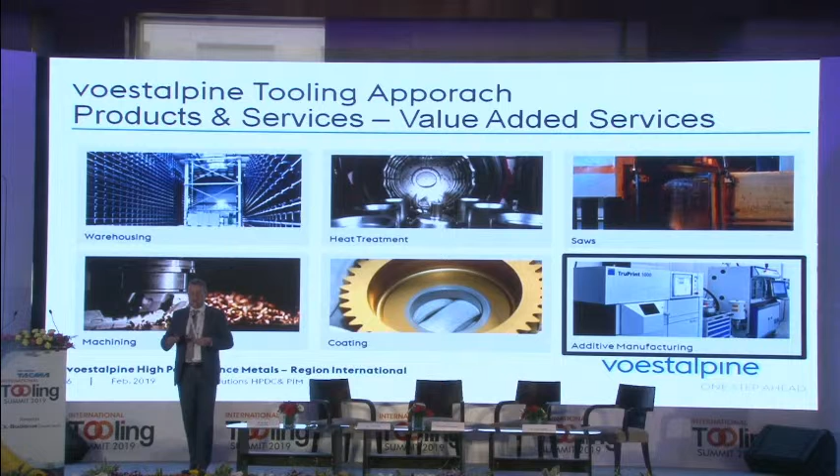But what's missing here is one corner, and we see it as the last step in the service development of our approach to you, which is the additive manufacturing. We started with additive manufacturing in 2015-16, and we made huge steps, which I want to show you right now, talking about our AM. Because additive manufacturing in the tooling industry is, in our perspective, the missing link to the full solution. From the steel to the service around the steel, right up to the last development of additive manufacturing, solving the problems we're facing every day on more or less every mold.

This brings me now to the approach on additive manufacturing. Where are we standing today in our big worldwide acting division? And this is the important thing, which is most probably differentiating us from all the others. We start already at the alloy development. So we create our own powder for additive manufacturing. We create it and we produce it. We have 2 mills where we do that, seriously.

That's the powder itself. But the powder is nothing if we do not have the right design and the right simulation service on that, followed by the printing itself, the post-machining, the heat treatment, as well as the coating. So we are ready to give you the part for using it. No other way for you. You just get the right part ready for the application. And this is just-in-time service. So this is our approach, quite different. We sell a solution, we sell responsibilities, not just euro per kilo steel. That's quite different.

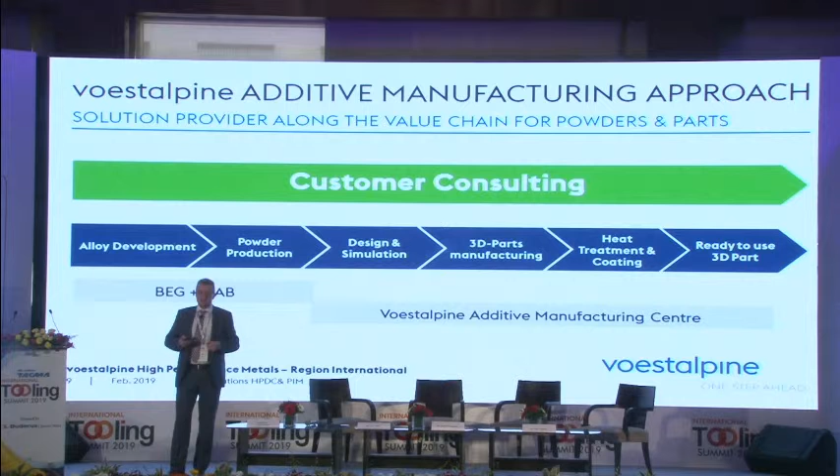Very quickly, we have in Europe our two plants where we do the steel production, and we added on both plants the powder production. One is in Sweden under the brand of Uddeholm, the other one is in Austria under the brand of Böhler. So we have our own powder, as I said.

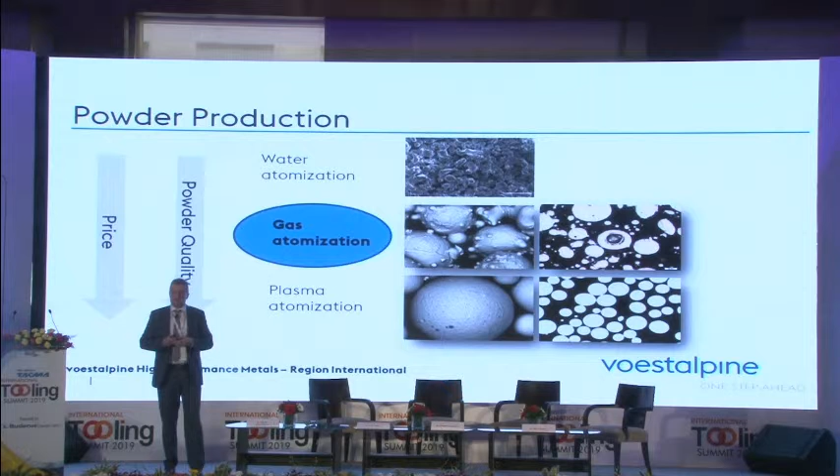When we are talking about the powder, we talk basically about three types of atomizing processes. But for metal additive manufacturing, we talk about gas atomized powder. Gas atomized powder then runs after the atomization through a sieving process where we sieve out our two powder sizes, listed here: 15 to 45 microns, as well as 45 to 150 microns. Why do we have different powder sizes? Because we have not only powder bed technology, we also have direct metal deposition in our setup to the market.

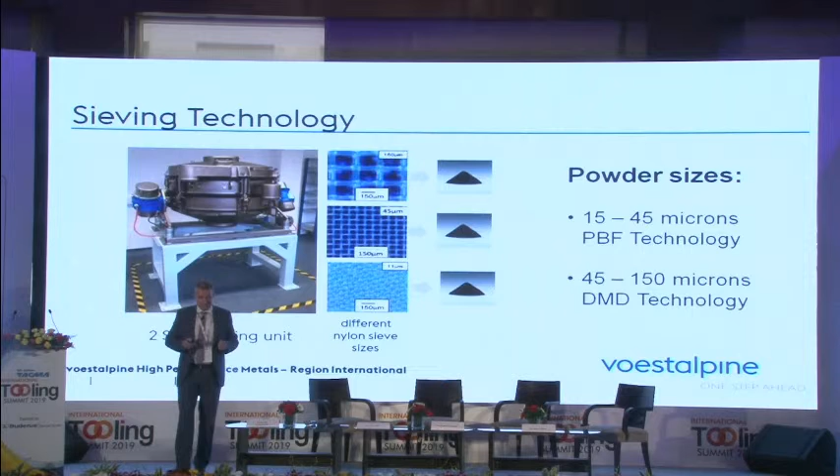This brings me now to the technologies where these powders we produce on our own are used. This should just give you an idea what the technologies are about. We could talk about that for hours, but I really want to come to the point. Whenever we talk about tooling, tool steel optimization, tool optimization, we talk about the technology with the best design freedom, and this is the powder bed fusion technology.

We have a second one. This is the direct metal deposition. We service it with powder as well as with wire. But here we are talking mainly about repair of tools, about service enhancements. So it's a little different technology, but for us the focus in the tooling industry is definitely the powder bed fusion technology, better known as 3D printing.

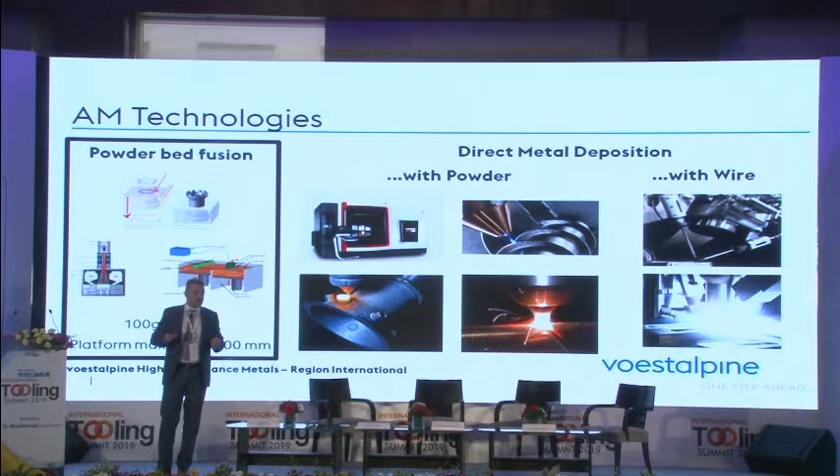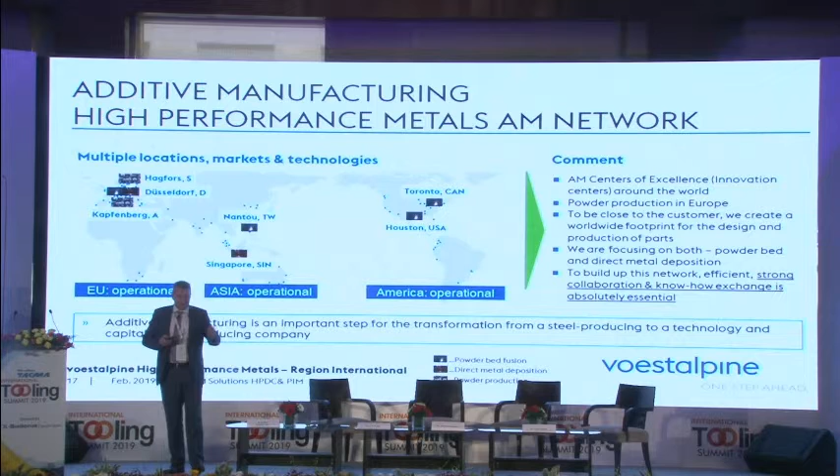So the USPs are clear: the right powder for the right application, with the right design, and the right printing technology. This chain is covered under the service chain of voestalpine. This makes the difference, and this makes us ready today, not to try something or do a little prototyping here or there, but to be prepared for the tooling industry.

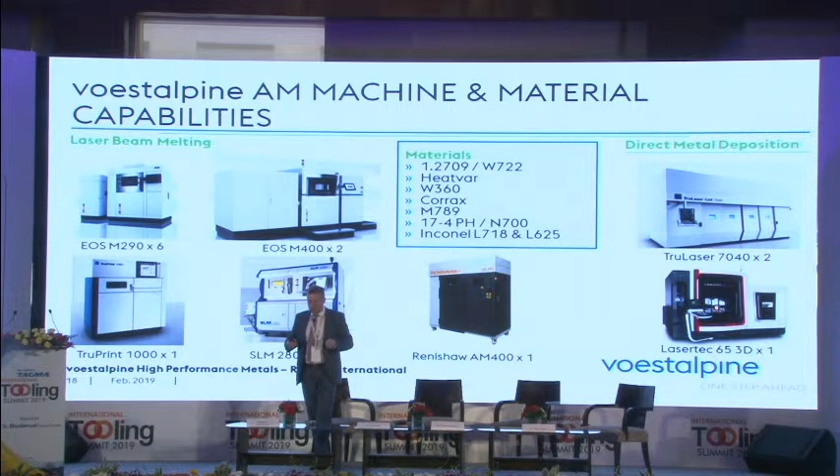What's coming now, dear colleagues, is just a few examples of success stories, confirmed by OEMs and Tier 1s, using additive manufacturing in die casting and injection molding. This is not something we tried in our labs. This is something the customer confirmed on the market all over the globe.

I would like to start with high pressure die casting, where we see three product groups where AM would make sense from our point of view. The first is the distributor or distributor ring, where we steer the liquid aluminum into the mold. The second is the heat-affected sliders, the parts moving in and out, creating holes and inner areas. The third is sub-inserts, or exchangeable inserts, used on the moving molds or sliders as exchangeable heat-affected parts. From each of these three groups I would like to show you one or two examples.

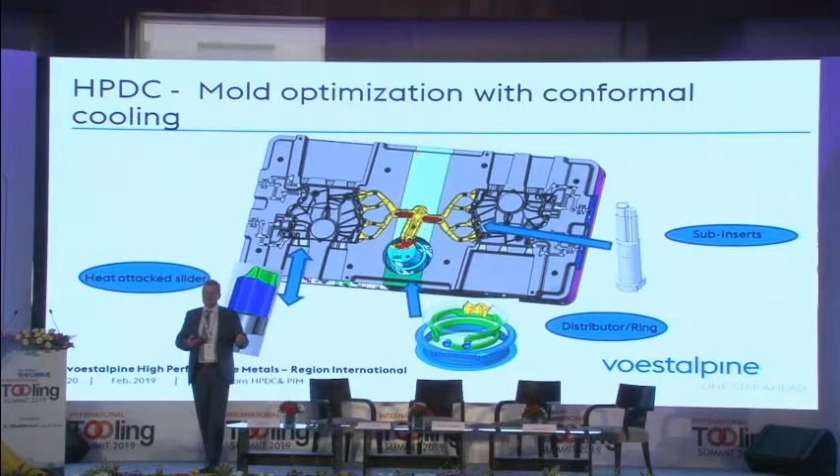In high-pressure die casting, what is important is to understand the customer. We have to know your pain point to react in the right direction. And we can make use of AM very efficiently in many directions. This could be to reduce the scrap rate, very often a serious topic. This could be to optimize part quality.

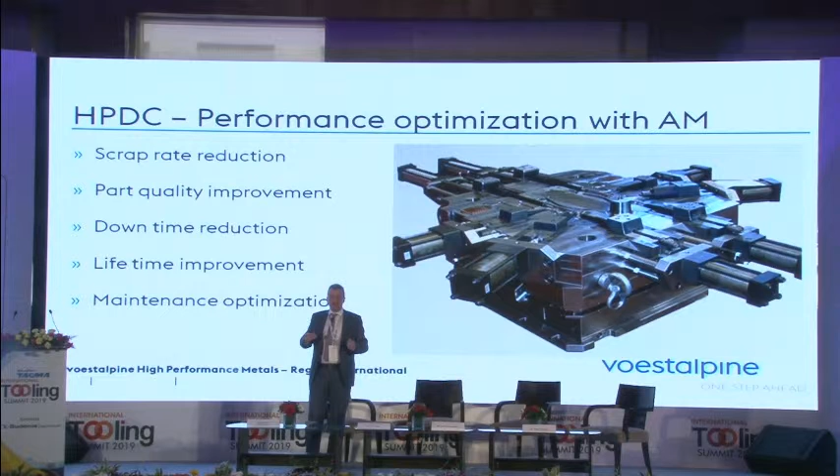This could be as well downtime reduction, most probably for the Tier 1s the biggest headache. Lifetime improvement of the parts themselves. Maintenance, also here in India, a very important topic. Optimized maintenance, no unexpected fallouts and maintenance required. These are advantages we can optimize with AM.

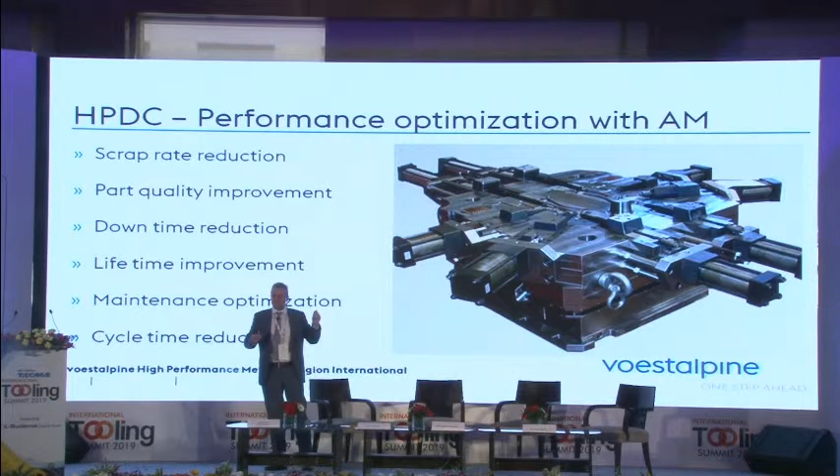And finally, we have certain products where we can also optimize the cycle time. So depending on these real demands of the market, we can optimize our solution to you, ladies and gentlemen. We can optimize our AM service around the steel to you.

And I would like to start with a distributor, which we have more or less on every die casting mold. And the pain points or the idea of the customer was here to improve the cycle time, because this is the main part where we can improve cycle time, as well as higher the lifetime. So you see just roughly the design, and you see behind me the additive version, the conformal cooled version. And this is exactly according to the needs of the customer.

This is very different if he's doing oil or water cooling, if he's running oil with 200 degrees or water with 25. This is very different if he has a third step pressure of 250 bars or 1,250 bars. So we have to know that in advance to make the tailor-made solution for you. This is what we call service in design and simulation.

And in this case, we used our own powder, our own design, our simulation. We print for the customer, and we do the heat treatment. And this is what the customer confirmed to us: we reduced the cycle time by 2.5 seconds, and we increased the lifetime by more than 400%.

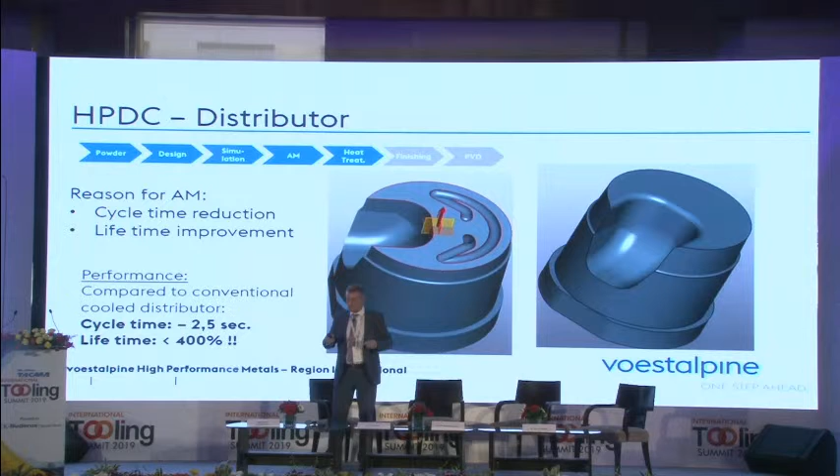Another example for optimization on the distributor area is shown here. This is a hybrid part. It was done with a steel frame and a copper insert. And we realized this in a monolithic way with conformal cooling out of our own powder. I have to tell you, the results are very promising, but the tool is still running, so we don't have final results, but the lifetime and the cycle time could be optimized.

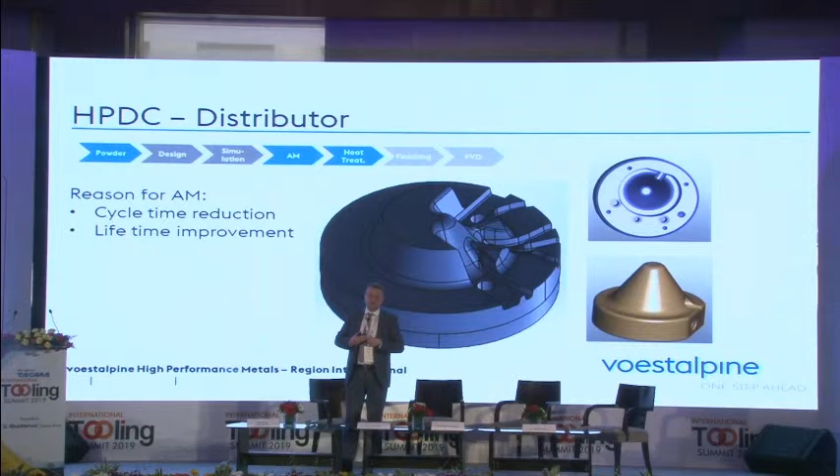When I come to the sliders, these are the moving inserts going in and out, then we have many more options than just to optimize cycle time. Here it is the scrap rate we mainly have to work on. So here we are talking about parts that are existing, having an existing base material, which is typically an H13 type. Could be also a premium steel from our brands. And the printed area. Printing is costly, so we optimize just that area we need for printing.

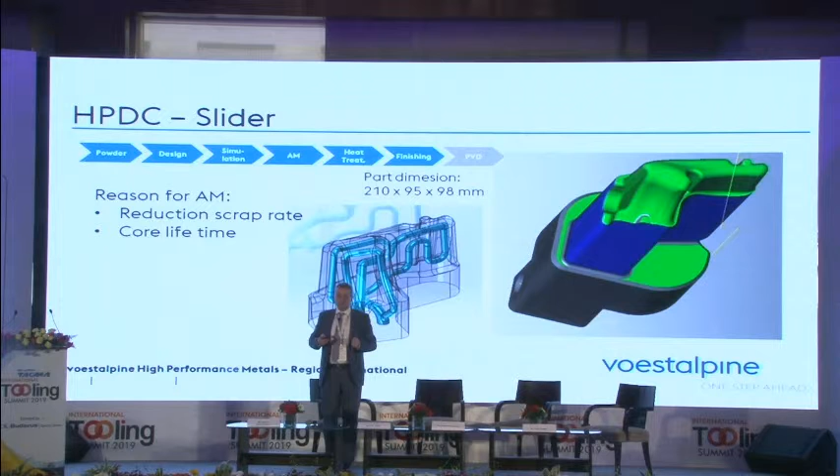And so that you see that we really know what we are talking about, I would like to demonstrate just this part, what tailor-made conformal cooling means. Not in, around, and out. We understand what is the need of the customer. We understand how to optimize this conformal cooling. So this is our real approach to you. This is our service to you. The printing is good, necessary, needed, but this is the service to you.

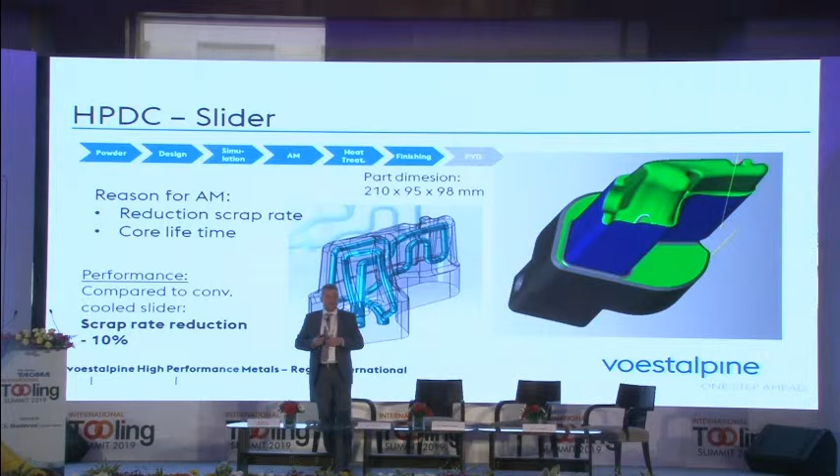And the result is very clear, given by the customer: a scrap rate reduction of roughly 10%. I don't have to underline what this means for an OEM, for a tier 1, for a die casting foundry.

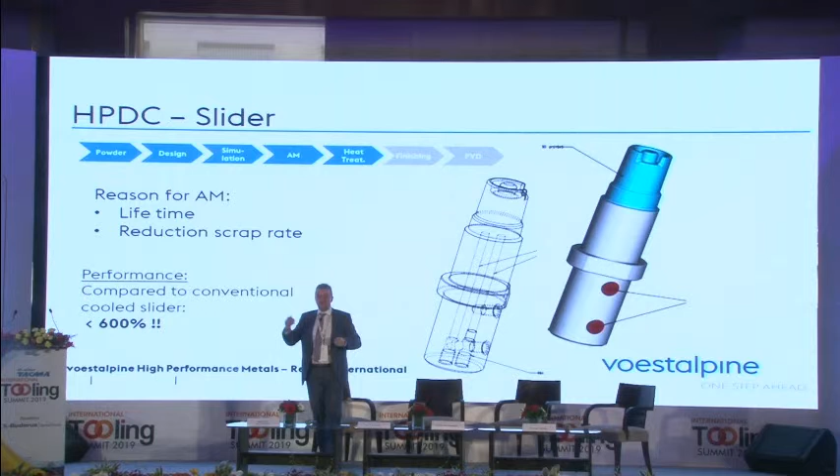Again, thinking on maintenance costs, again thinking on downtime, I don't have to explain that this is very, very efficient, even if it's more expensive at the start of the product.

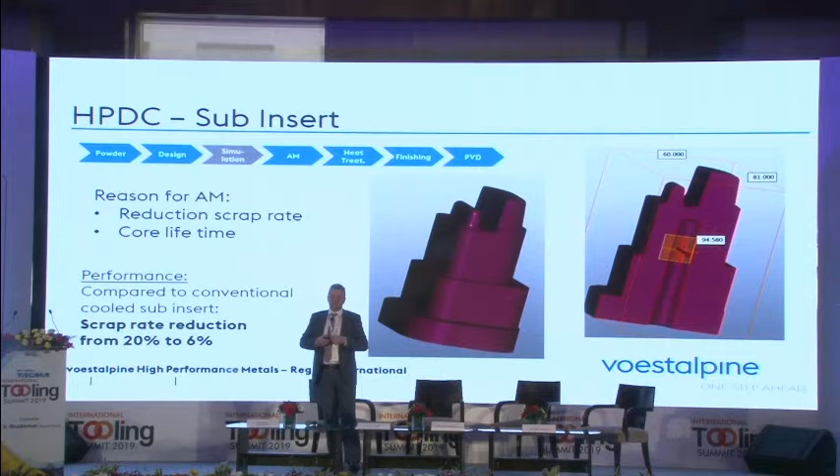Sub-inserts, again here an example of how to optimize a scrap rate. If you look at the existing fountain cooling, and at the critical areas where we have to defend the steel with conformal cooling, that will not work out. With our tailor-made solution, with the right powder, also our own powder, with the right printing technology, with the right design, we could reduce the scrap rate from 20 to just 6%. And this was quite welcome at the customer's.

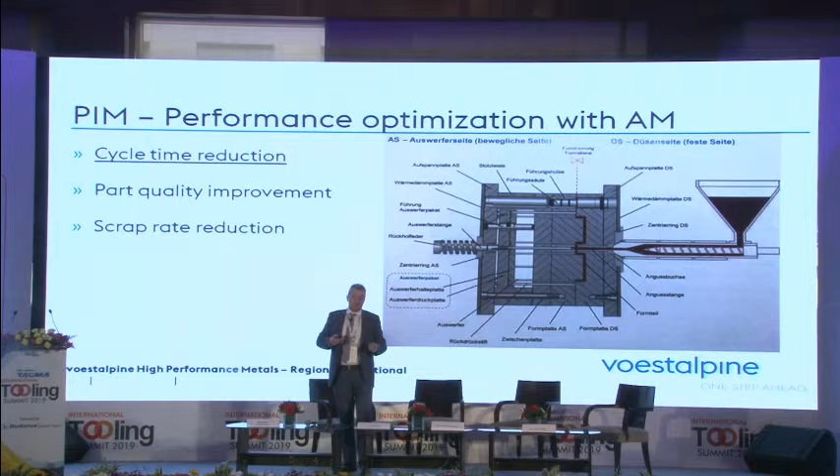Three more slides about plastic injection molding, because this is also a very, very important topic in industry here. I don't have to explain the technology, colleagues, but I would like to underline that here the cycle time is most often required as the strongest improvement. But beside that, we also had requests for part improvements, scrap rate reductions, downtime reductions, as well as lifetime improvement, and finally also to have maintenance under control. These are also important things for the injection molding industry, especially when we talk about these new technical plastics coming more and more into the automotive industry, electronics, and white goods industry very seriously.

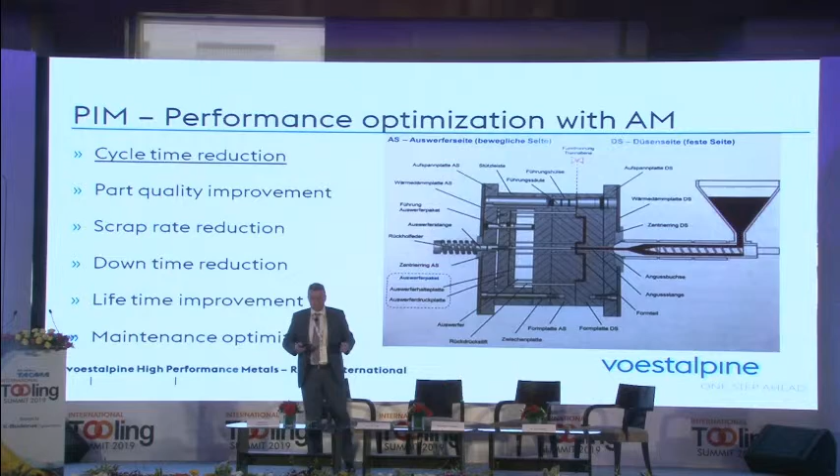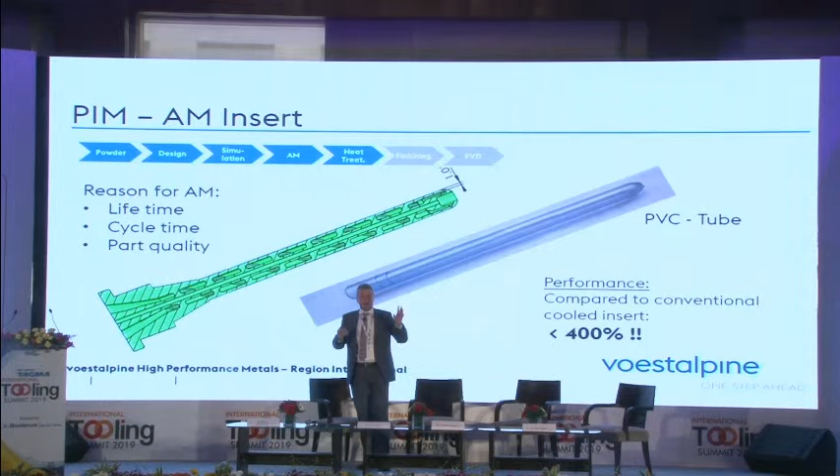So we collected the customer's environment, and out of that, the tailor-made solution done by our powder, by our design, by our printing. Feedback from the customer: thanks a lot, more than 4 times longer lifetime. In this case, we are talking about much more than 1 million parts they could realize so far. Of course, every case study has a certain story behind it, but I don't want to stress it too much. Just want to highlight what were the pain points and what was the solution here.

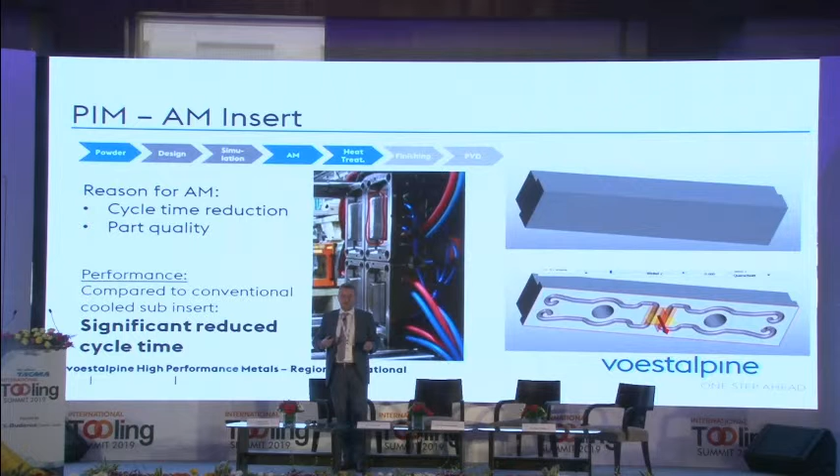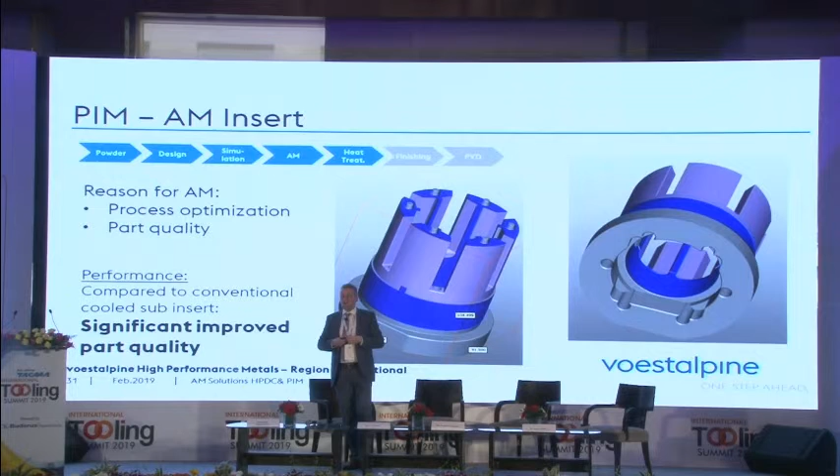You see here very thin ribs existing, and they were not able to cool them down. With our additive solution, we could achieve a precision of 1 degree temperature difference. Again, our powder, our design, our solution, our printing, our heat treatment. The customer confirmed with the next order that he is very, very satisfied with us.

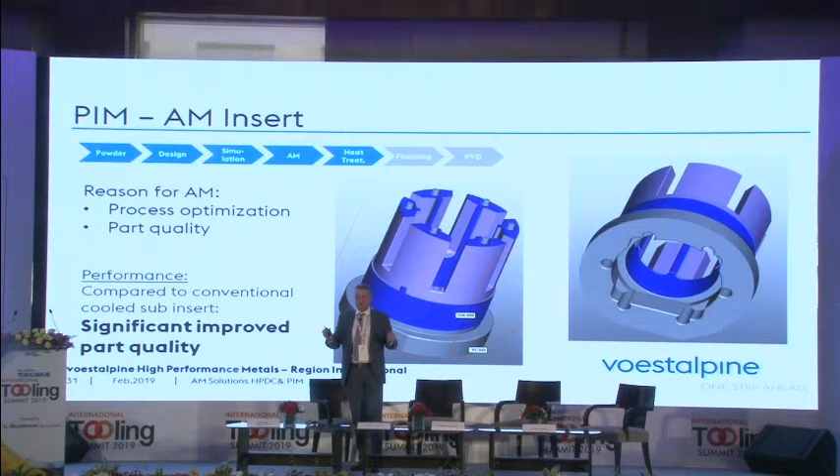So there are many reasons for AM. We are here for you. We are here in India with the strongest sales team, with the strongest setup, with additive actions very, very soon. As I said, the missing link to being the full solution provider to the market, also here in India, is from our point of view, AM. We are convinced with that. We go for that, and I wish you a lot of success with our solutions to be professional in the tooling industry in India. Thank you very much.